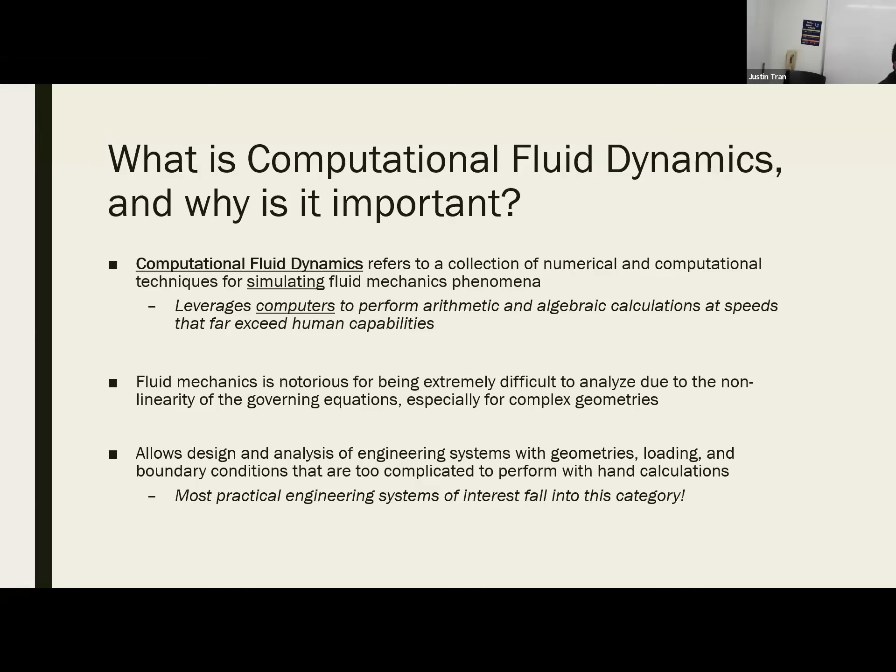So basically any practical work that you're doing in terms of engineering design or analysis with fluids, nowadays you have to use CFD for it. There's really no other way to analyze it unless you're doing experiments. And so through this, we are able to do all the really cool modern engineering work with fluids in terms of design and analysis on these really practical systems that you otherwise would not be able to do without CFD. Okay, so just to give you an example of the scale. What I'm showing you here, this is just a very simple pipe flow.

So we have flow, pressure-driven flow in a pipe. So we have pressure on one end, pressure on another end. If there is a difference in pressure, then that's going to drive flow from one end to the other. Okay. This is the type of problem you would probably see in your 333 class, your fluid mechanics. This is one you can very easily solve with Navier-Stokes.

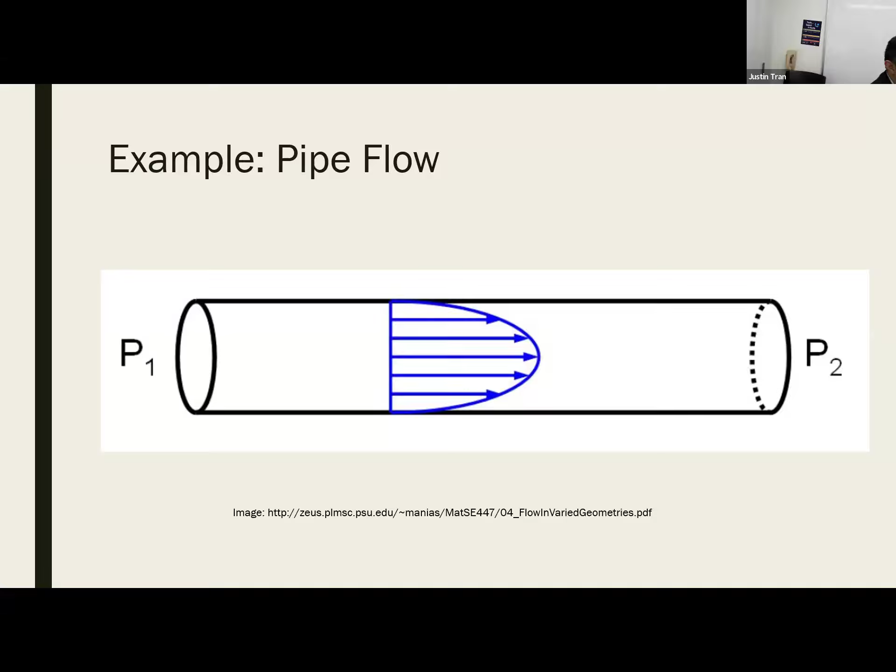But if you start to get into more complex scenarios like this, so this actually here is a screenshot from my research. And so what this is showing you is kind of an experimental cardiovascular surgery, actually. So just to give you a bit of background, this blood vessel right here and this blood vessel right here, I don't know why it's blue. Normally these two aren't connected, but we've actually connected these two with a shunt for certain patients that have a single ventricle. So that's basically patients with only half their heart working.

And so they need to do some, casually speaking, we have to do some plumbing on their blood vessels to make sure that this person has a fighting chance to be able to survive with only half their heart. And so one way we do that is to connect these two blood vessels to basically give a little bit of extra energy, a little bit extra flow to this blood vessel here.

Okay, so you can see in the situation we have very complex geometries. Blood vessels are not straight pipes; they are very smooth and contoured, and kind of have a weird shape. And so we wouldn't be able to analyze a system like this without CFD. You can see here we have a little bit of turbulent flow coming in here. We have kind of a jet here that splits off into two jets here. We have one that's impinging on this back wall. So this is something where you need to have CFD in order to analyze properly.

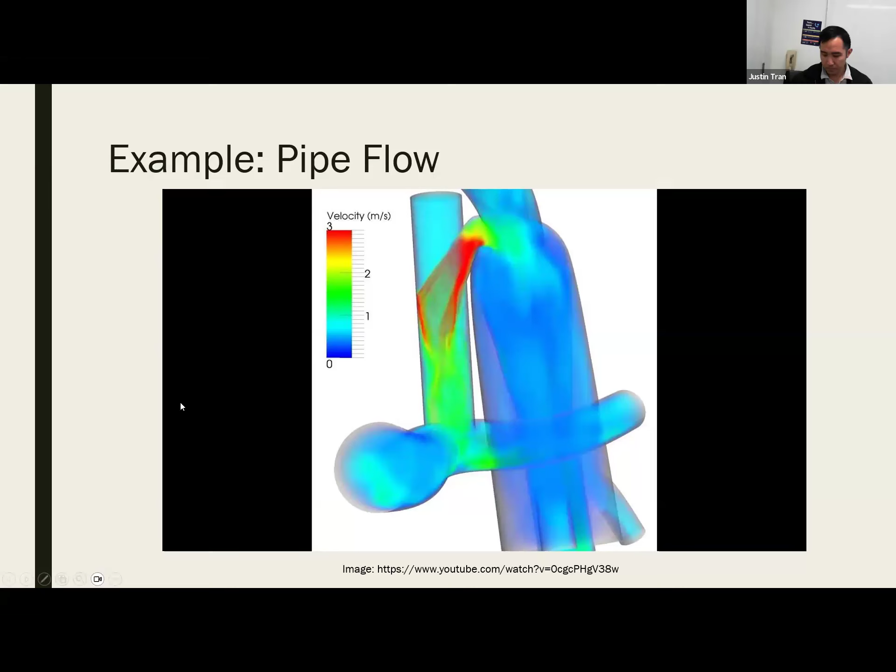Okay. So speaking of fluid mechanics, these are the equations for fluids. So hopefully this brings back some good memories from fluid mechanics. So this is the Navier-Stokes equations, which refers to the conservation of momentum in fluids. And we have the continuity equation up here, which is the conservation of mass. So these are very complicated nonlinear partial differential equations, which are not able to be solved normally. We can solve these in very simple situations, but for most practical cases, you can't really solve these equations without a computer.

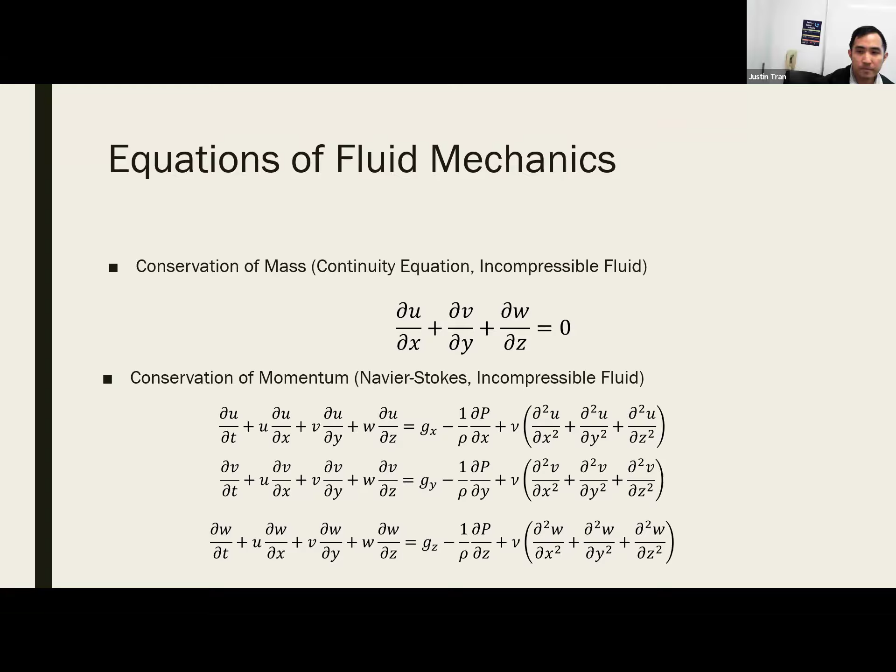Okay, so let's talk more about some applications. These are probably two applications that a lot of you are probably interested in. So on the left, we have an automotive application. Automotive design is very heavily influenced by the aerodynamics of the airflow that goes over the car, because the amount of drag that you have on your car has a lot to do with the fuel efficiency, with the top speed, the performance, and with how complicated car chassis are, you're basically unable to really analyze them without CFD.

Okay. The other image that I have on the right there is a very simple image of an airfoil. And so that is obviously an application from aerospace engineering. Aerospace engineering and CFD go together hand in hand as well. So if you're going to be doing any kind of design or analysis of aircraft with complex turbulent airflow going over it, you need to have CFD in order to properly analyze it. Otherwise, it's just not possible. Okay.

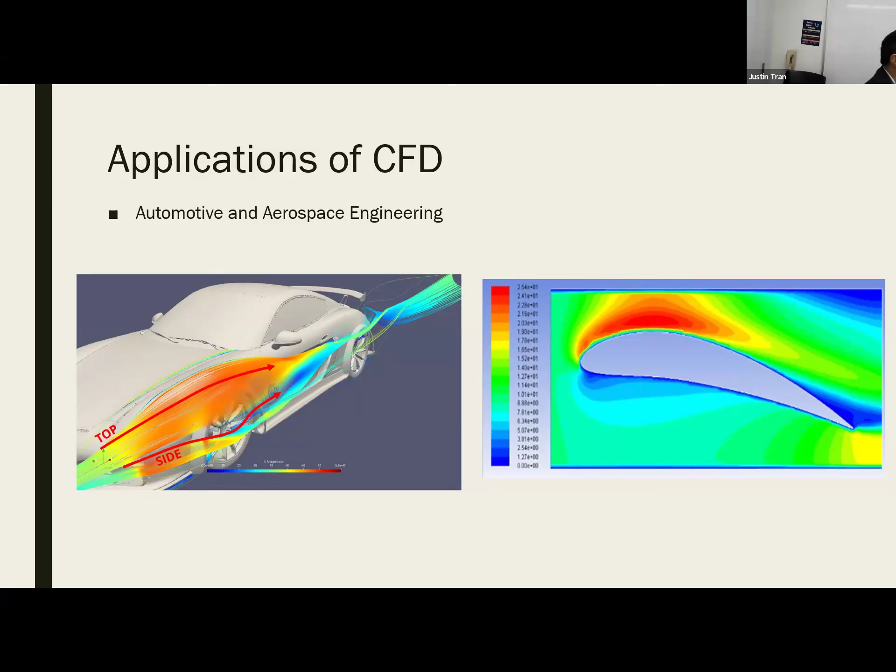All right, but there's also applications in environmental engineering as well. On the left here, we have a large scale CFD simulation of airflow over a very large region. A lot of the weather predictions that you see on the news in terms of predicting which way a storm will go, CFD plays a role in that. You need to be able to model and predict which way the winds are going to blow and how that's going to affect your weather.

Okay. And on the right there, you can actually see a CFD simulation of a windmill that is producing power as well. So CFD obviously plays a big role in designing those kinds of structures as well. Okay. Let me pause here just because these are nice images as well. Are there any questions on anything so far?

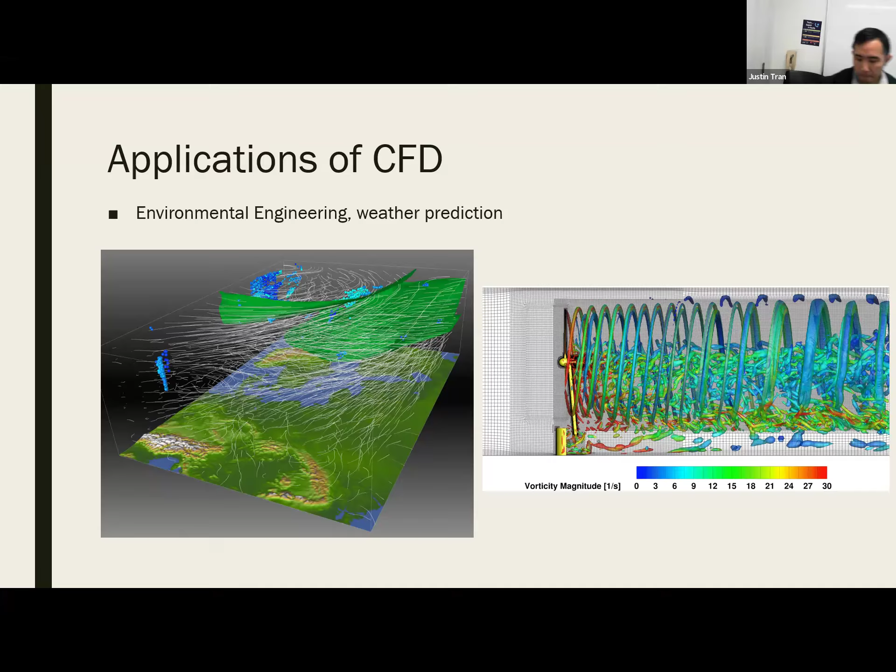Good. Okay. All right. So, like I mentioned before, if you're going to be doing any kind of practical work in fluids, no one really does calculations on pencil and paper anymore. You really kind of fall into two categories. And so you can either do experiments or you can do simulations.

Okay. And so if you're taking an experimental approach, your goal is to try to recreate the fluid flow conditions in real life and measure the results, right? And so a very common way to do this is to have like a wind tunnel, which is kind of what you see on the right there, right? And so experiments are always great for getting accurate and reliable data because there's really no disputing an experimental measurement because it actually happened. There's very little room for error in that sense.

But the downside of running experiments is that it can be very time consuming and expensive to set up. So oftentimes you'll see a situation like this where you need to create a prototype. This is probably not a full scale airplane here. This is probably a scaled down version. But even creating that prototype takes a very, very long time, right?

And so usually, practically speaking, you have to do experiments. You can't just fully rely on simulations to do your engineering work. But you oftentimes want to limit the amount of experiments that you do, because you can't really afford to be doing a ton of these types of experiments.

And so I would say the bulk of design work, bulk of engineering work with fluids nowadays happens in simulations using CFD. Okay. So a lot of times, people will use CFD to run a simulation on airflow over an airplane and use that to iterate on designs. And then usually 90% of the work is done there. Once you feel pretty confident about the design, then you'll take your results from CFD and apply that to an experiment to try to verify whether what you got was good or not.

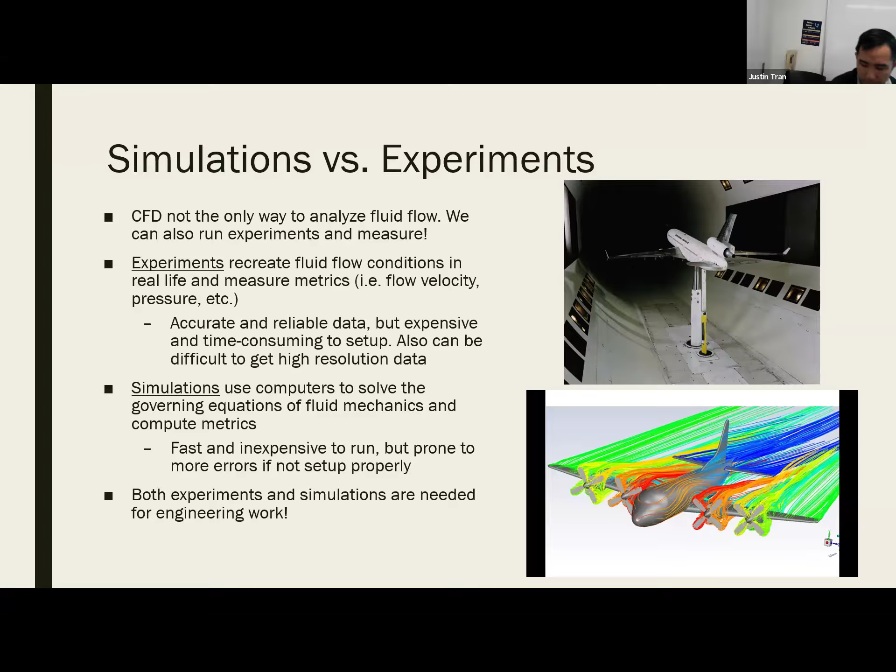Okay. All right. So, another question that I get asked about classes like this, where we're not just going to be learning the software, but we're actually going to be learning the theory behind what goes into the software: why are we bothering to learn the theory? Why are we bothering to learn the computational techniques? Okay. And so, doing CFD is more than just using the software. Right? It's more than just using OpenFOAM to run a simulation and generate a nice plot. Okay.

Because it's important to remember that these simulations and these softwares are simply just tools for you to perform engineering work. Okay. And just like any tool, it has limitations and best practices that need to be properly understood before it can be used effectively. Okay. Because the thing with simulations, and if you have experience doing FEA or ANSYS you would know this very well, it's not going to work all the time. And so, there's plenty of ways for a simulation to go wrong. There's literally millions of different errors that can show up.

And so in order to use it properly and to debug these errors, you need to have a firm understanding of the fundamentals behind the technology so you can debug these problems and get reliable results. Okay. Because my goal by the end of this class is for everyone in this class to become experts in CFD, right? A lot of you guys are graduating this semester, or this summer, or in the fall, right? And so if you're going to be going to a company and doing CFD work, I want you to have the confidence to say that I'm an expert in this.

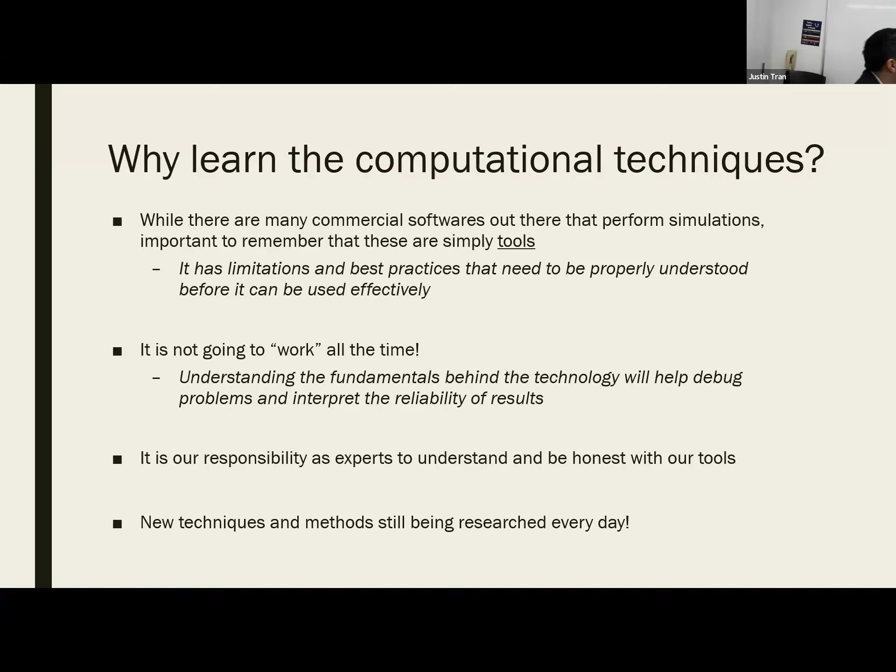Okay, so to give you an example of why it's important to learn this conceptual background knowledge, let's take a job that I think probably a lot of us have experience with: a vet, right? If you've ever taken a pet to the vet, you know that the vet has to have a lot of what I call procedural skills. They have to know how to give a shot to an animal, how to take a blood sample, or perform eye and ear checks, right? So this is generally what we expect our vet to do.

But we also expect our vet to have conceptual knowledge as well. So for instance, they have to know why they're giving your animal a shot, right? They're not going to say, oh yeah, I kind of feel like giving them 3 shots today. And then you're like, why? This is my cat, don't just give them random shots, right?

And it's kind of the same for us as engineers. We're expected to not only know how to use our tools, but to really understand them on a deep level as well.

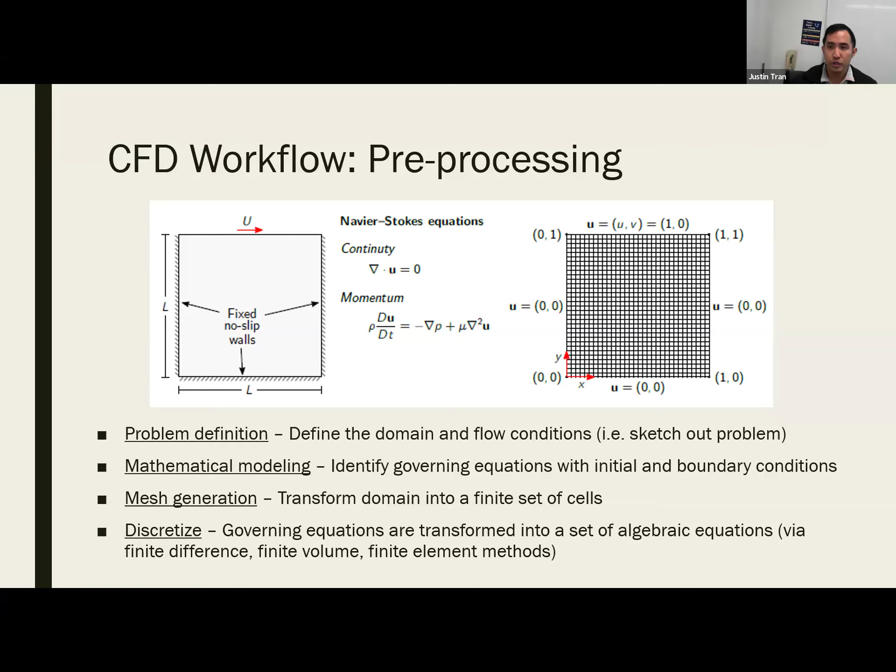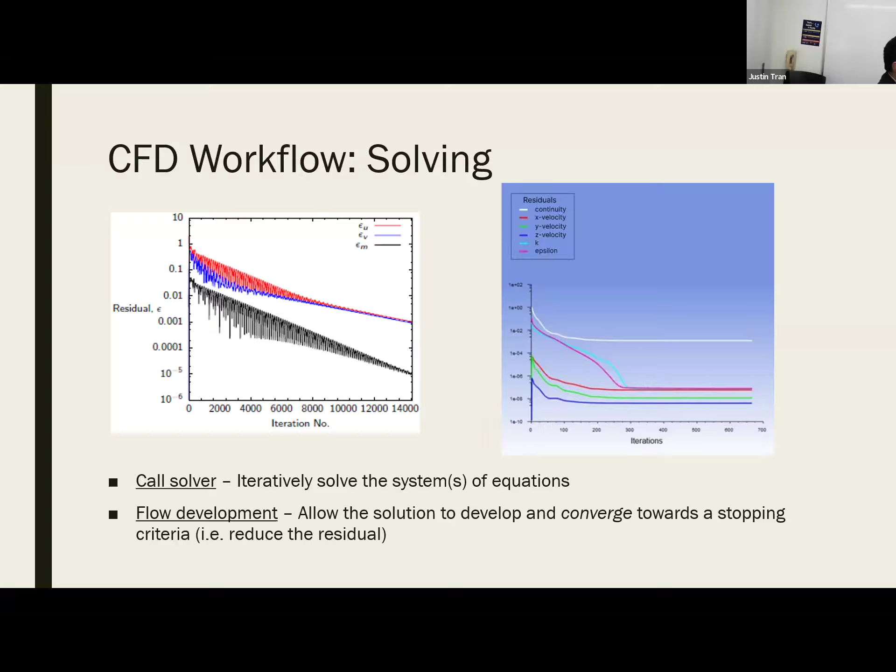Okay, so the second step, broadly, we can call the solution step. This is actually the step where you do the least amount of work; the computer is doing a lot of the work. Once we've set up the problem and done our pre-processing, we just hit go and let the computer do its thing. The only thing we're doing is monitoring it to make sure things are going smoothly in terms of what we expect.

And then the last step is the post-processing. Whenever you run a computational simulation, the results that you get directly from the solver are usually not directly useful. So there's a little bit of post-processing and visualization that you have to do in order to produce plots like the following that you can actually interpret and use for engineering design. So those are the three general steps: the pre-processing, the solution, and the post-processing. Of course, we'll be going over these in a lot more detail throughout the class.

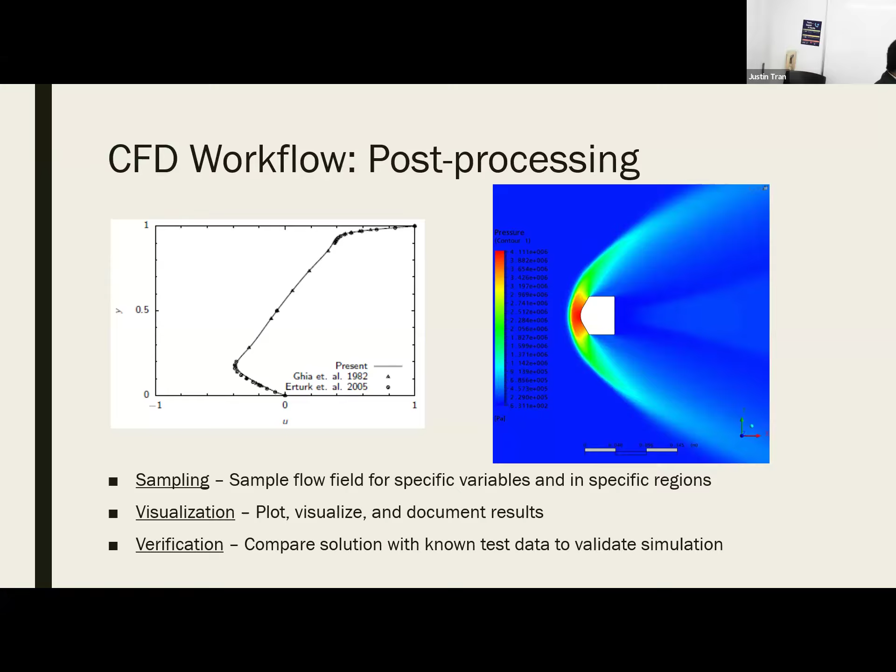Okay. So let's talk briefly about different CFD codes. There's lots of different software out there that can run CFD. In fact, it's kind of a claim to fame: a lot of people want to write their own CFD code and have it become famous and have everyone use it. We're not going to go through all the CFD codes out there because there's literally a lot of them.

But I do want to make a distinction between two different kinds of codes that you're most likely to experience out in the wild, so outside of this class. The first class of codes are what I call commercial codes. These are the type of codes that you spend money on. Usually most companies use an active subscription model, so you have to renew the license for these softwares every year. That's how these companies make money.

Okay. The benefit of a commercial code is that they are actually developed by a company, and they have full-time developers that are paid a full-time salary to support the software. Usually these types of softwares have more bells and whistles, like a graphical user interface that you can click around. They actually have a support team that will answer your questions if you email them most of the time. Which is really nice, because a lot of times you want to have these nice features.

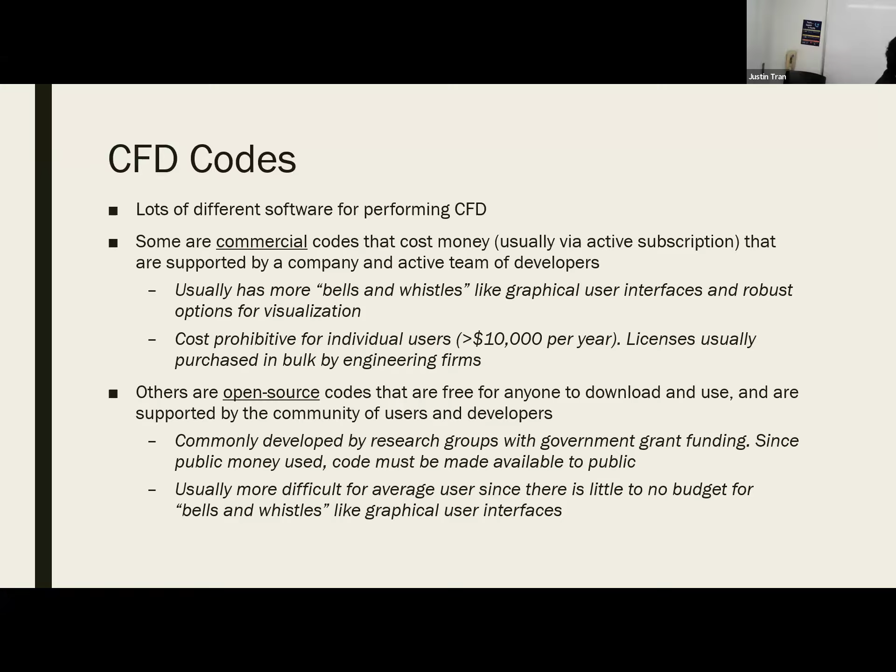I mention that because the main software that we're going to be using for this class is OpenFOAM. OpenFOAM is probably the biggest open source CFD project out there. It has a great community and has been very active for a very long time. I think the project is about 25, 30 years old at this point. It's an open source toolbox written in C++, and it's distributed under the GNU General Public License. Okay.

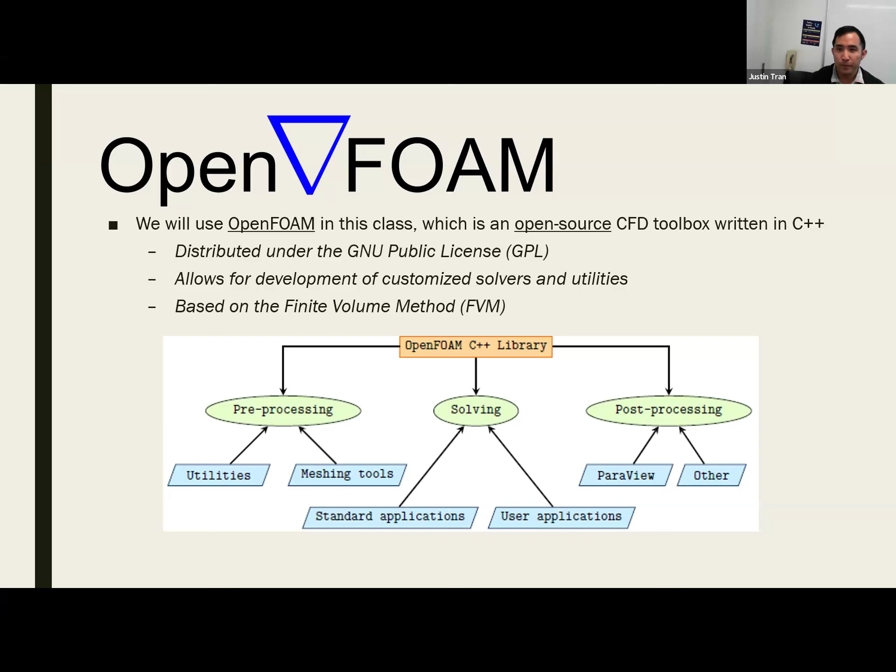OpenFOAM is great. It's been used to do a lot of really great work, and a lot of great research is based on OpenFOAM, but you have all the downsides of being an open source code, mainly that there's no graphical user interface. So the way that we use OpenFOAM is that you have to know a little bit of coding, and you have to be familiar with a Linux interface.

I think that'll be the big step up for most people here: using Linux for the first time. If you've never used Linux, it's going to be very different than what you're used to. Linux is a whole other operating system. Most people are familiar with Windows and Mac. Linux is kind of the odd cousin that people don't talk about a lot. But Linux is great for open source projects.

And so maybe something you didn't expect from this class is that you'll be learning a little bit of Linux along the way. But that is something you can put on your resume too. And that's something that employers actually like if you do have experience with the Linux terminal.

Okay. So to set up an OpenFOAM simulation, you have to set up this very strict file directory. You have to have these files in the right places. And all of these files are written in basically text code. But don't worry, we'll cross that bridge when we get to it, but I just want to send a warning now. Any questions on this before we jump to the syllabus?

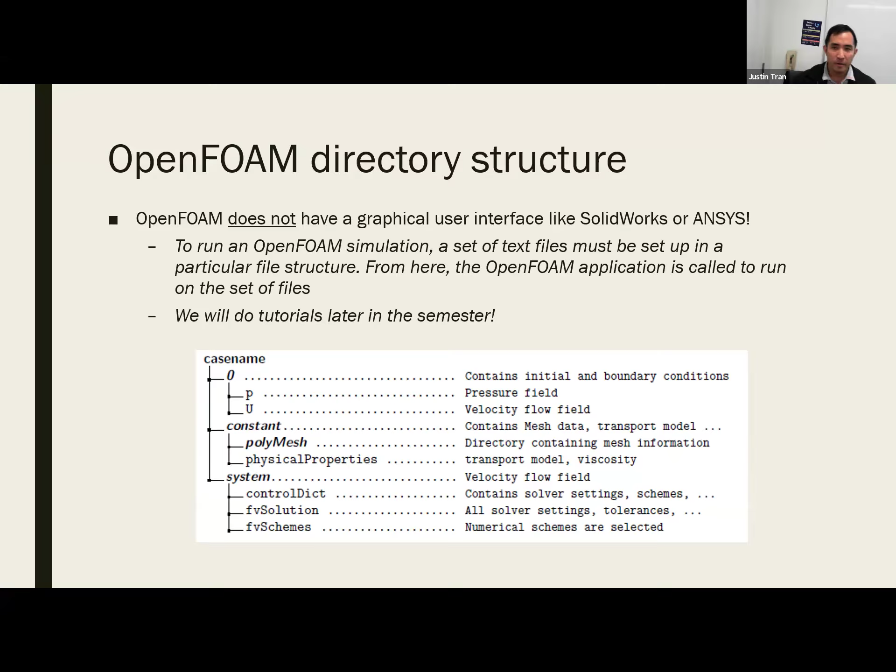So hopefully that gives you a little bit of sense of the structure of the class and what to expect. For the first half of this semester, I would say the first 7-8 weeks, we'll be doing mostly theory. That will be more pencil and paper, traditional note taking. There will be a little bit of MATLAB sprinkled in. And then the second half of the class will be focused mostly on OpenFOAM, to help prepare you to do your final project as well. Okay, so let's talk about the syllabus.

So the first thing I want to talk about on the syllabus are my office hours. Office hours are going to be 3 days a week. I will be physically in my office, E220, during office hours, but you are also free to join via Zoom as well. There are Zoom links on the course website for you to join office hours for each of these times.

My office hour times are Monday, Tuesday, 2:30 to 3:30 p.m. So that's basically right before lectures on Mondays. I also teach at 4 p.m. on Tuesdays, so that's right before the lectures on Tuesdays. And then Thursdays from 1 to 2 p.m.

I know what everyone's thinking, these times are not ideal. Usually I don't like to stack them. All of these are stacked in the early afternoon. Usually I like to have a little bit more variety in my office hour times, so I'll have one in the morning, one in the evening, one in the mid-afternoon. But one thing that just happened to me recently is I have a kid now.

And that limits my availability. In the mornings, I'm usually taking care of the kid before my wife prepares for work. And even in the evenings, I have to hurry home and give my wife a break from taking care of the kid too. So I'm really only here late mornings up until the early evenings, and that's when I can do the office hours.

So, with that in mind, these are not the only times I can be available, because I know you guys are all really busy. If none of these times work for you and you want to talk to me, you have questions on the homework, the content or the exam, just send me an email and we can set up a time to meet, most likely over Zoom, maybe in the late evening or early morning, whenever works. So don't be afraid to reach out and set up an appointment. But at least these will be the times where I'll be available for sure for office hours.

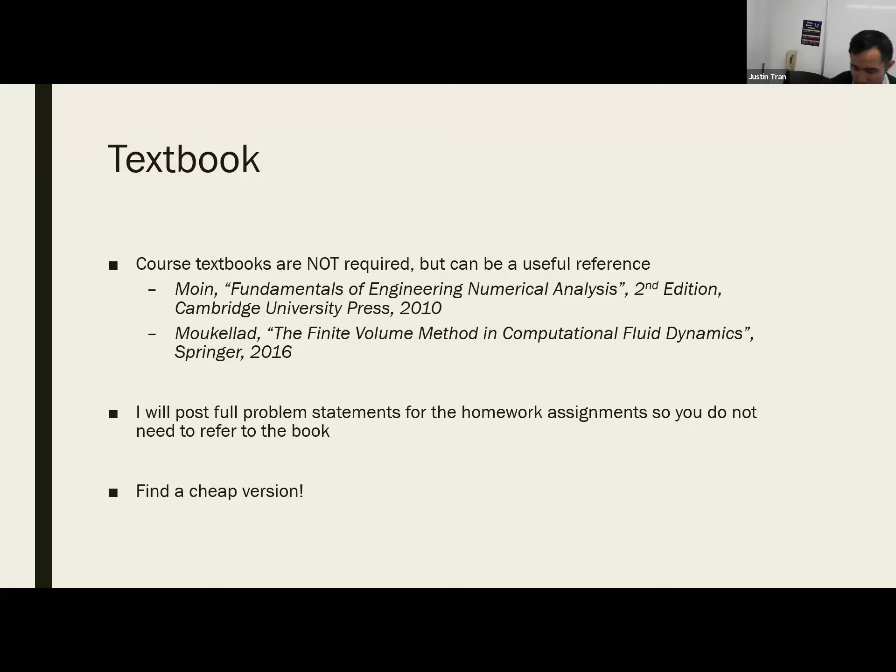Okay, programming. Naturally, being a course in computational fluid dynamics, there's going to be some programming involved. On the one hand, we're going to be using a little bit of MATLAB in the first half of the course. That's just to drive home some of the theory that we're learning in terms of finite differences and finite volumes. I don't plan on making it an emphasis. None of the projects are going to require MATLAB. But it is useful to use MATLAB to really see how the finite difference method works, how the finite volume method works.

Okay. So I think someone sent me an email already that they're feeling a little bit uneasy with the programming. There will be some MATLAB programming, but it's not going to be an emphasis. I think probably the bigger programming aspect, or the bigger computational aspect, is going to be the Linux stuff that we're going to do in the second half. Probably no one or very few of you actually have direct experience with Linux, and so that stuff we'll be learning from scratch for sure.

Okay. But I do expect you to at least know how to open MATLAB, how to do a basic for loop, basic if statement, define a variable. And so I am going to be assuming that you do have that kind of basic information when we do the first half of the class. But just know that the MATLAB is not going to be a huge emphasis. So if you're a little bit rusty on the MATLAB, don't worry too much. We are going to do a little bit of review. And the Linux stuff, because it's going to be everyone's first time, we'll be doing that one from the basics.

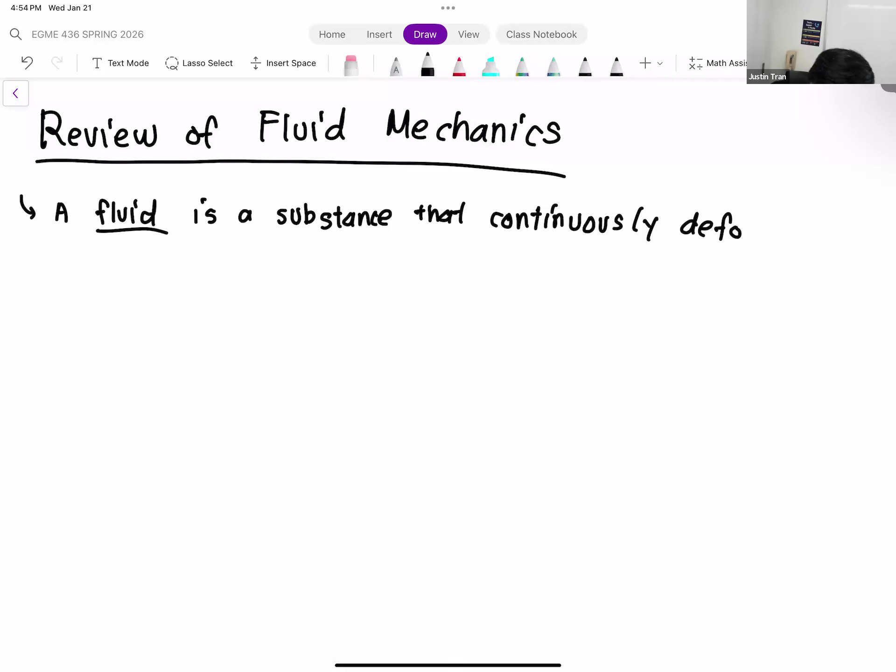Okay. The key word here being continuously. And so we make a distinction between fluids and solids. So solids, if you apply a stress to a solid, it may deform a little bit, but eventually you reach an equilibrium state where the solid no longer deforms, right? For example, let me take the stapler right here. The stapler is a solid object. If I apply a force to it, you can see the stapler goes down, but eventually it stops because it's a solid object. A fluid is not like that. A fluid, if you continuously apply a force to it, it's going to continuously deform.

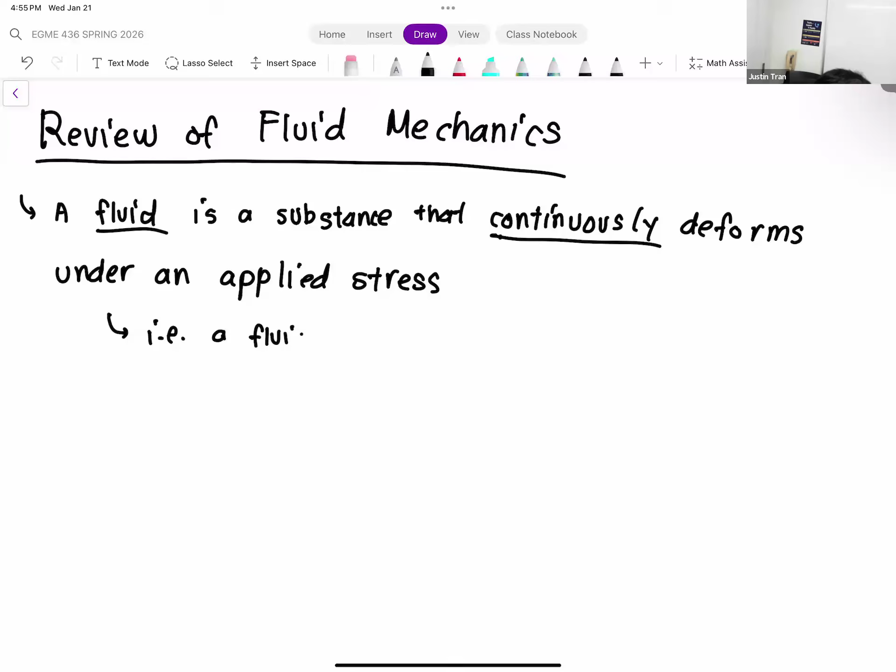And so no one's saying that, oh, the air is continuously deforming out there, right? We say the air is flowing. And so the way that we typically describe this in normal speak is flow. Okay.

All right, and so in CFD, we're interested in basically simulating fluid flow. I know there's a whole area of hydrostatics. I think that's probably the first thing you learn in fluid mechanics, but we really don't care about hydrostatics in this situation. We're really only interested in fluids that are in motion. And so because of that, we are interested in a very particular property of a flowing fluid called the velocity field. So the velocity field of a fluid is a vector field that describes the direction and speed of the flowing fluid at every location within that fluid.

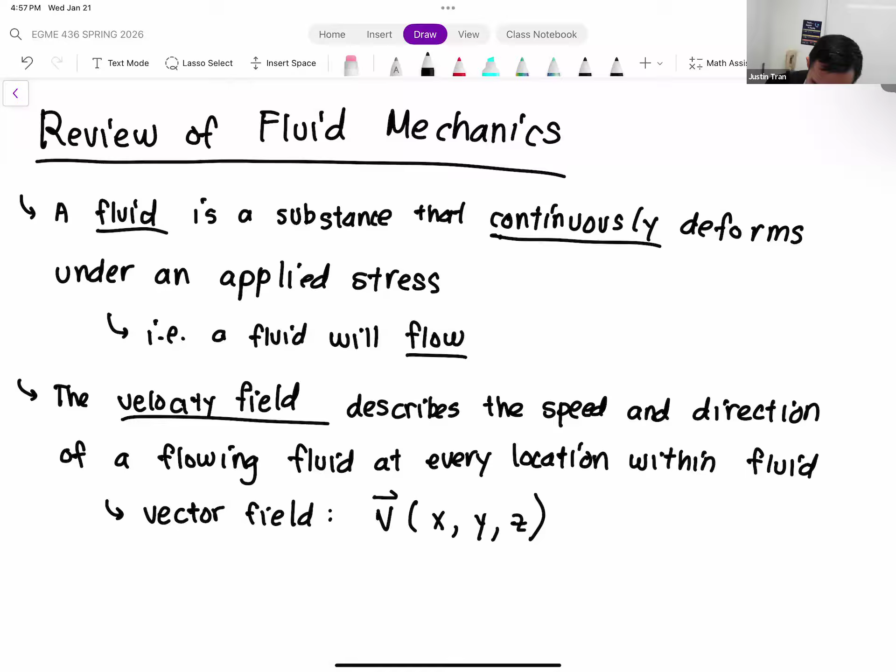And so the way that we describe the velocity field is that it is a vector field. And if you remember anything about vector fields from Calc 3, basically at every physical location, we're going to define a vector there. So the way we typically define this is as a vector field V with an arrow on top. And this is going to be a function of physical coordinates, X, Y and Z in 3D. So again, this vector V here represents the flow velocity vector. And this XYZ here, these are physical coordinates.

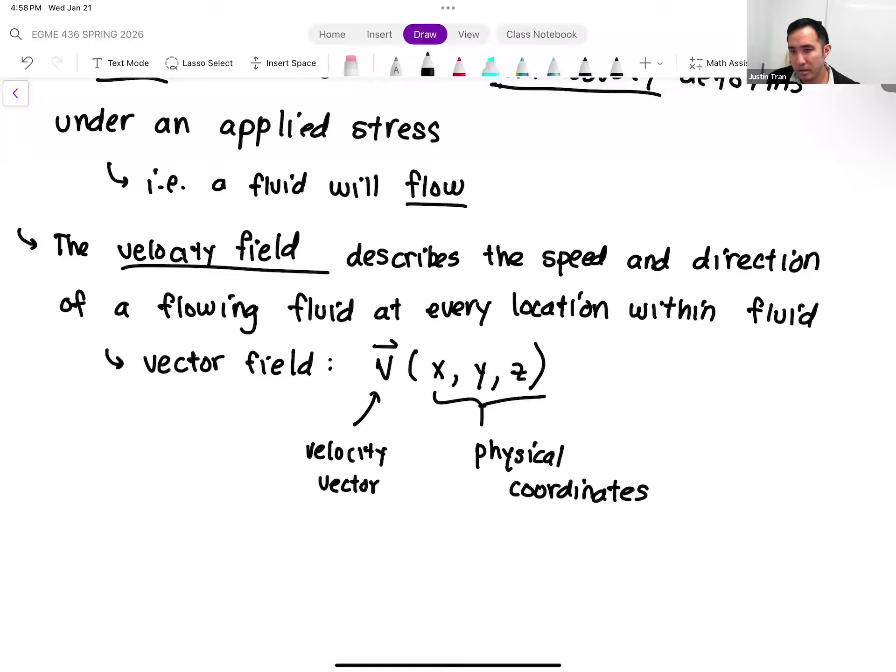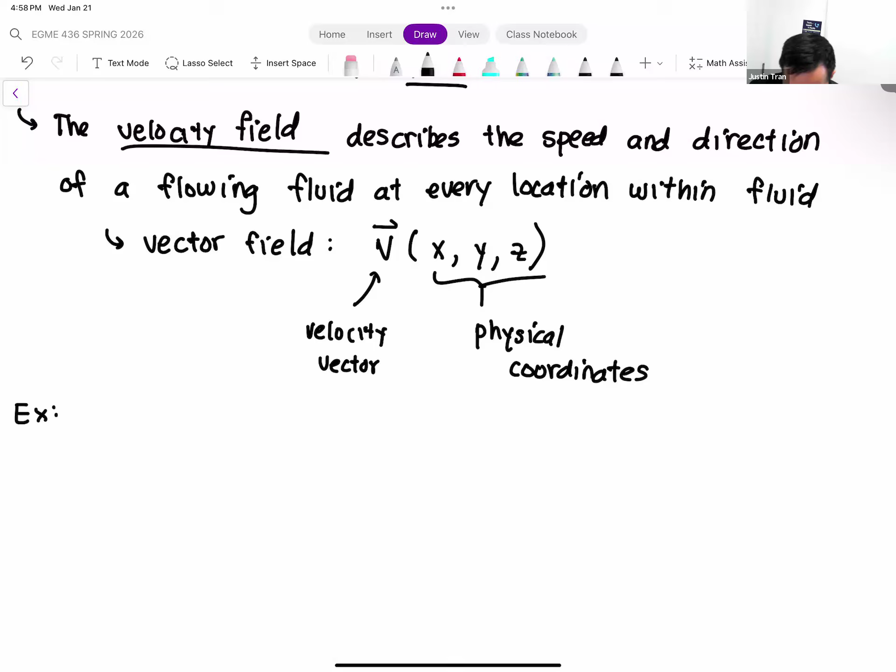Okay. So let's draw this out just so you can visualize it, because describing a vector field is not the same as visualizing it. So let's do an example here. Let's say that we have a very simple velocity field of a flowing fluid that looks like the following. And let me actually use blue. So let's say we have flow in like a river or a stream or something like that that looks like the following.

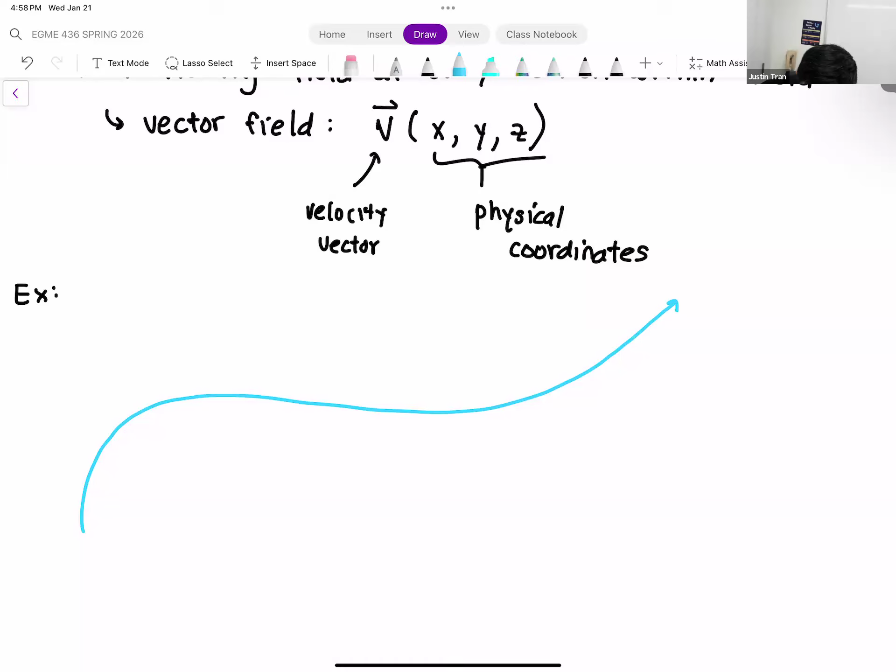Okay. That's a good measure. Okay, so the blue lines that I've drawn here are the direction of the fluid flow in this application. So we can say this is maybe fluid flow or flow of water in a stream.

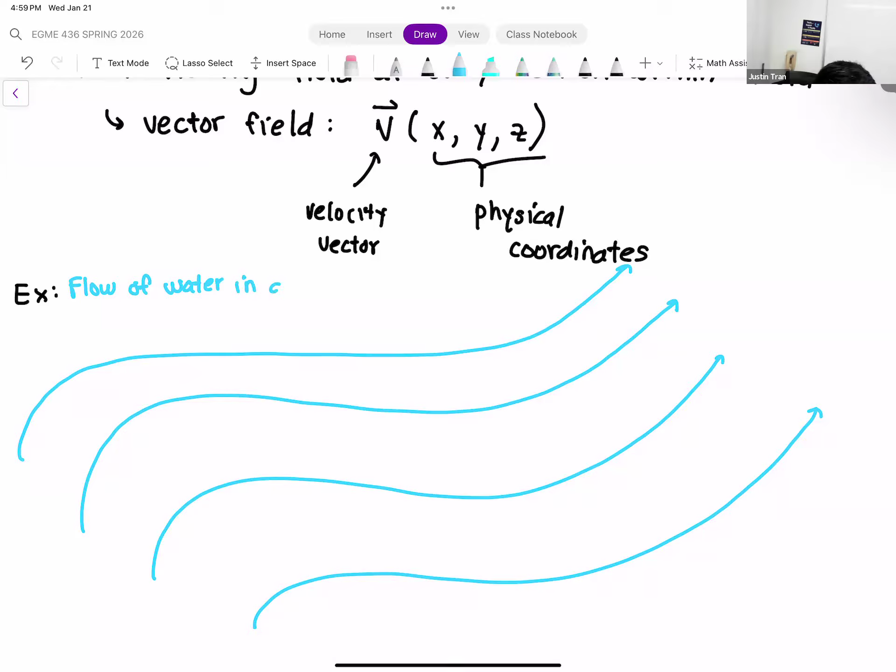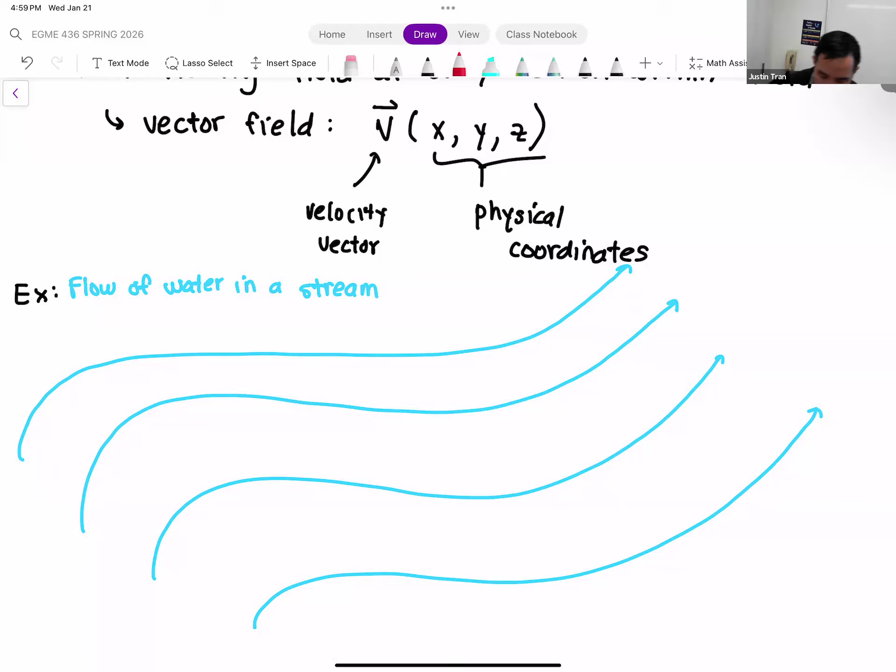All right, so the way that we can describe the velocity field in this is that, first of all, we need a coordinate system, and so we need to have an origin, right? So let's say, well, this is obviously a 2D scenario, so I'm only going to draw XY coordinates. So let's say we draw the origin right here. X, Y, okay? So this right here is the origin of our coordinate system.

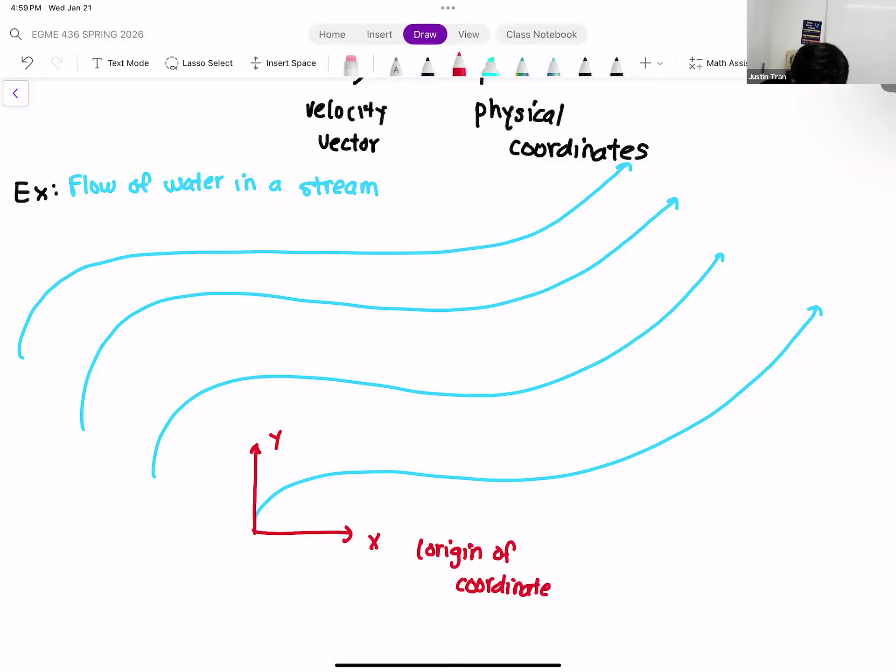We're using Cartesian coordinates just to be simple for now. Okay. And so based on that origin, we can define a physical point by a paired X and Y coordinate, right? So let's say that we define this point right here. So this point, we can say that its coordinates are x1, y1, right? Or that x1 and y1 are the x distance and the y distance from the origin. Okay.

And the same thing, we can draw another point here. Let's draw this one here. We'll call this x2, y2. Okay. So the requirement to have a vector field is that you do have to have an origin, because you need to be able to describe the physical locations of every point within the field.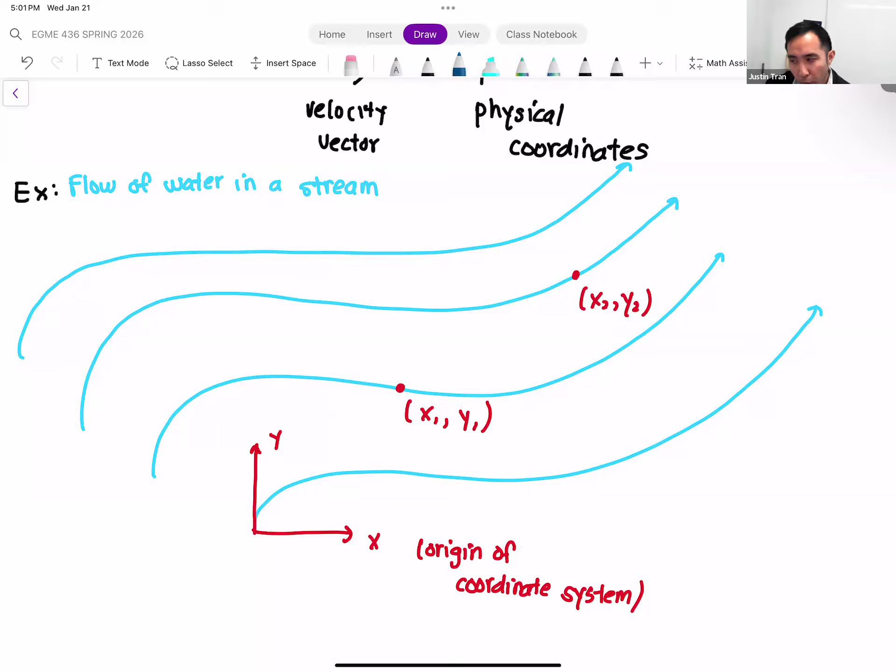All right. So the velocity field, at each of these locations and at basically any location within this field, we can describe what the velocity vector looks like. Okay. And so let's use dark blue. So let's draw what the velocity field would look like at these two locations, x1, y1 and x2, y2. So at x1, y1 here, the velocity field is going to basically follow the flow. It's going to be a vector that points in the same direction as the flow and have a speed that matches the flow as well. So at this location here, we have a vector that goes like that.

So we have a vector that points almost horizontally to the right. It's going down a little bit. And so this vector right here, this is V vector at x1, y1. Okay. So that's our velocity at that location defined by our velocity field. And then at this second location here, we can draw another vector that's parallel to the field. And so this vector here, this will be v at x2, y2. Okay.

So the idea with the velocity field is that, for any given location within the fluid flow, you can define what the flow vector is going to look like. And a vector, remember, always has direction and magnitude. Okay. So velocity fields is a concept that we'll be coming back to continuously in this class, because the main output or the main goal of CFD is actually to produce the velocity field in your flow. And that's often what we're going to be simulating for. All right. Any questions on this so far? Good. Okay. So that's the velocity field.

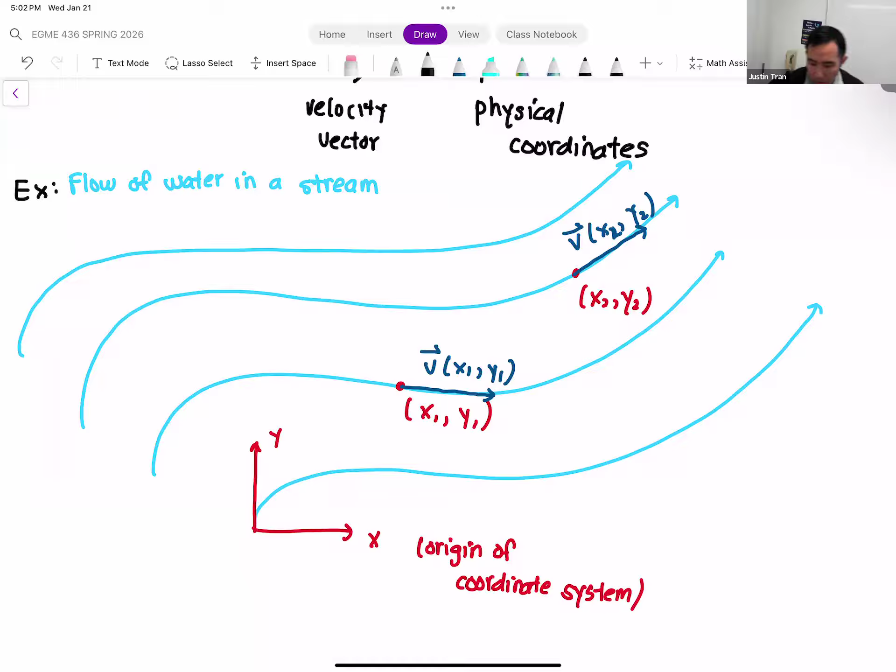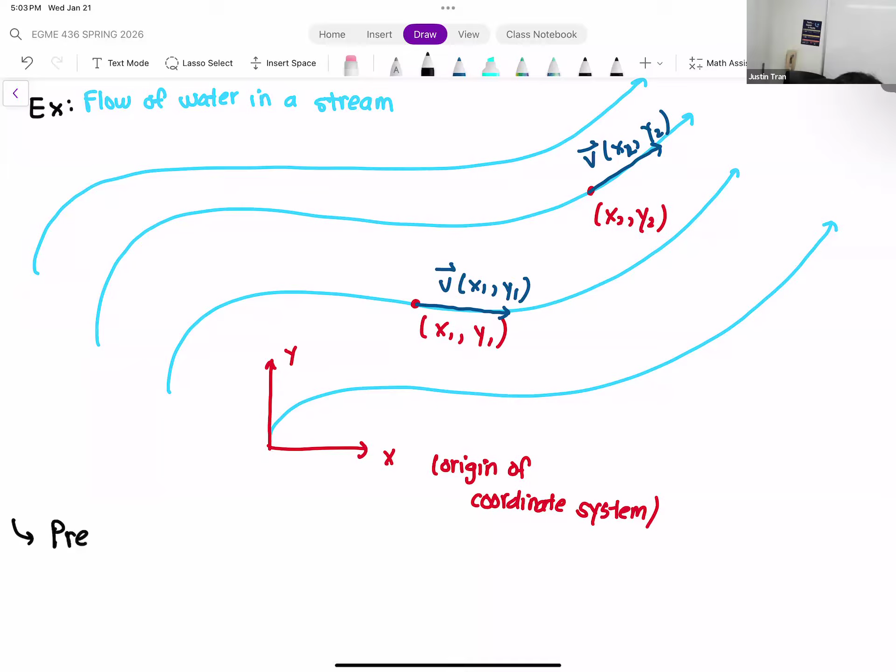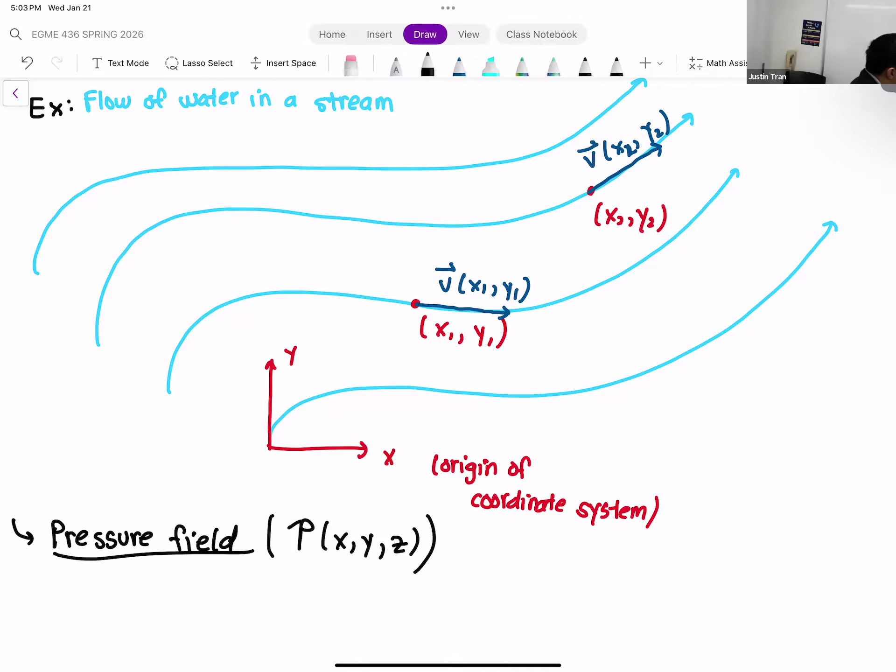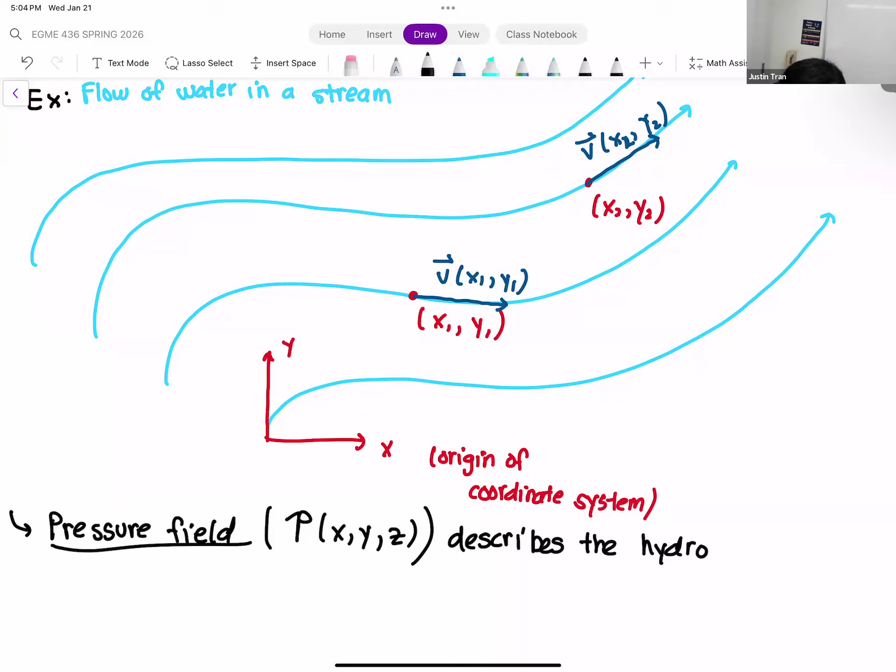Although in fluid mechanics, there's another field that we're usually aware of, and that is the pressure field. So the pressure field, similar to the velocity field, is a field variable, and so it depends on the physical coordinates, and so it's going to be a multi-dimensional variable. For the pressure field, we usually denote it by a capital P, and again, it's going to be a function of x, y, and z, or just x and y if you have a 2D situation. And so the pressure field is going to give you the hydrodynamic pressure at any given location within the fluid. Okay.

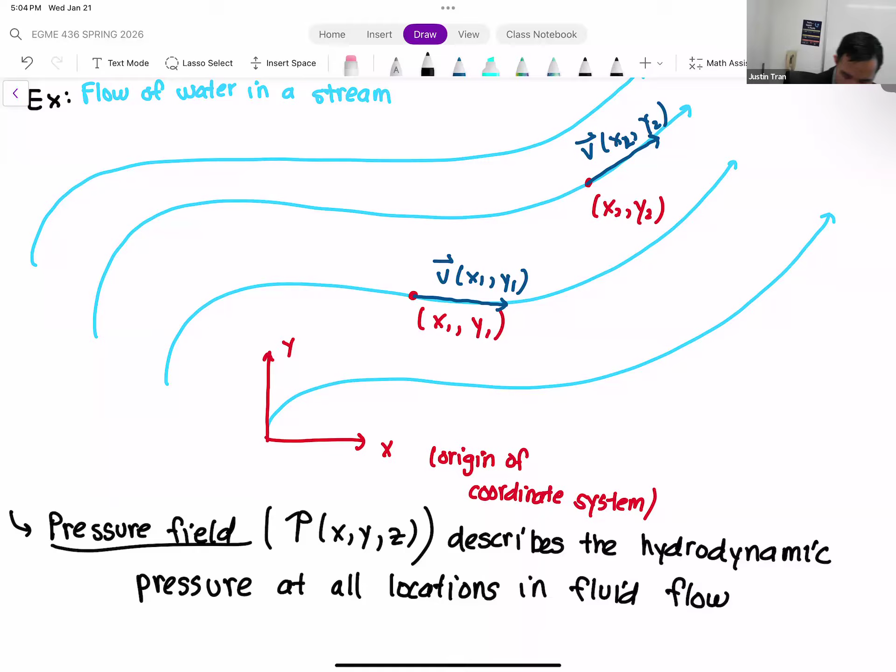All right, so we have these two field variables that we are going to keep in mind. Along with the velocity field, the pressure field is also a primary output of CFD. So oftentimes when we run CFD, we'll get the velocity field and we'll get the pressure field as well. Now, pressure is an interesting concept because it's not a vector. Pressure is a scalar quantity. And so what that basically means, a scalar just has magnitude. It doesn't have direction. Okay.

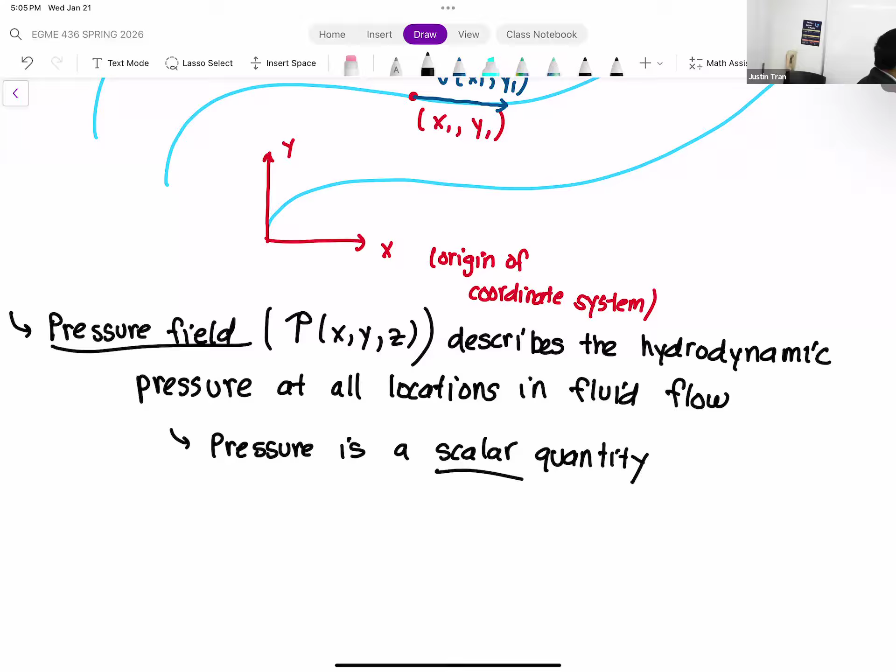But remember, the reason pressure is important in fluid flow is that oftentimes fluid flow is driven by differences in pressure. Or another way to describe it is that fluid will flow from high pressure to low pressure. Okay. Just to put it very, very simply.

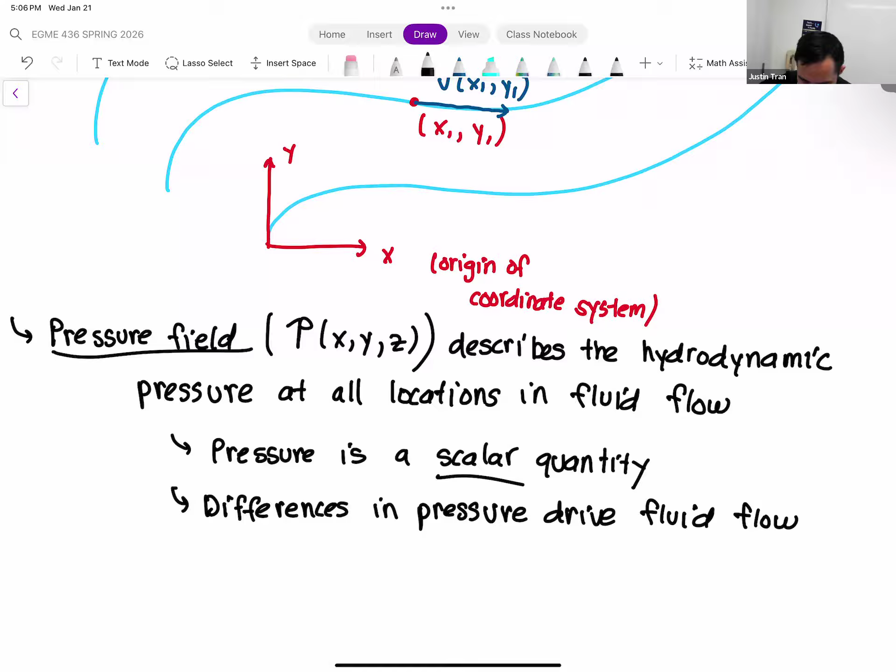Pressure fields do have other applications as well. If you're going to get into high level aerodynamics, and if you're going to be dealing with shocks or wakes or drag, then pressure is going to be important there as well. But just on a very rudimentary level, if you understand the pressure field, you can make a prediction in terms of which way the flow will go. The flow will go from high pressure to low pressure. All right. And so, like I've mentioned, the first goal of any CFD simulation is to solve for the velocity field and the pressure field in a given flow situation.

And then usually from those pressure fields and velocity fields, you can compute lots of other really interesting quantities, like drag, lift, shear stress, wakes, vortices, things like that. But step one, always solve for the velocity field and pressure field. Okay.

And if you kind of remember from earlier in the class, velocity and pressure, these are basically the active variables of the Navier-Stokes. And so essentially you solve the Navier-Stokes equations, you get velocity and you get pressure. Okay. All right. Any questions on this so far?

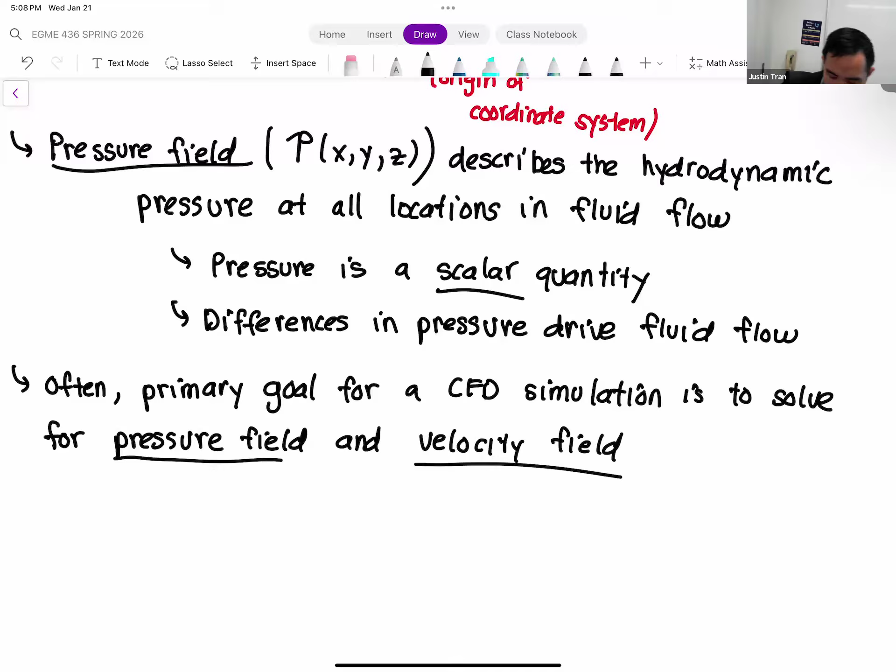Okay. So let's talk very briefly about fluid material properties. I think that will be the last thing that we cover today. So even though fluid is a different state of matter, they do have their own properties. And if you're going to run any CFD simulation, you do need to input these properties because different fluids are going to behave differently, right? Air is going to flow a lot differently than molasses. And so you need to make sure that you input these properties correctly in order to accurately simulate.

And so there's two main properties that you basically have to apply for every single flow. There's usually more properties besides this for more advanced applications, but at the very core basic level, these two properties are the ones you have to input for every simulation. All right, so let's start with density first, so that one's a little bit easier to understand. So density, hopefully, requires no introduction. Density describes the relative mass of the substance relative to its volume.

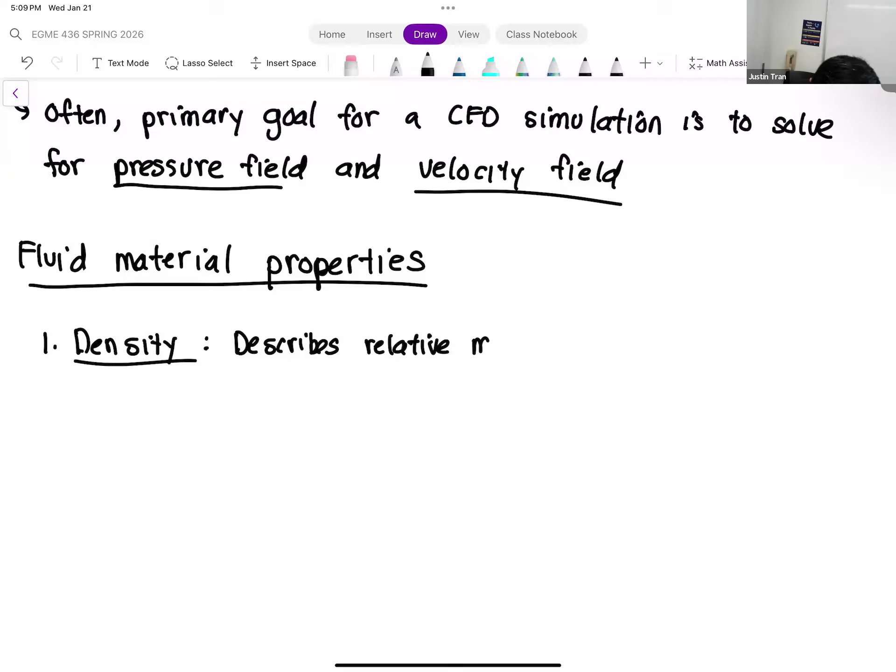Okay. Right, so there are different substances that have higher density. Usually, those are substances that have very heavy molecules that make up their chemical composition, and there are substances with very low densities. And what's interesting about CFD and just fluids in general is that you have a very wide spectrum of different densities. On the one hand, you have a very common substance that a lot of industry would work with, which is just air. So air is very not dense, mostly just because the distance between air particles is very, very large.

But there's also applications for CFD where you work with very, very dense fluids, things like liquid mercury. And so there are applications for that where you would want to run CFD. So there's a very wide range of different densities available in fluids, and that obviously drastically changes the behavior and the results that you get from CFD. Okay, so the other comment that I'll make with density, one that will become very relevant later on, is that oftentimes we assume that the density of the fluid is constant.

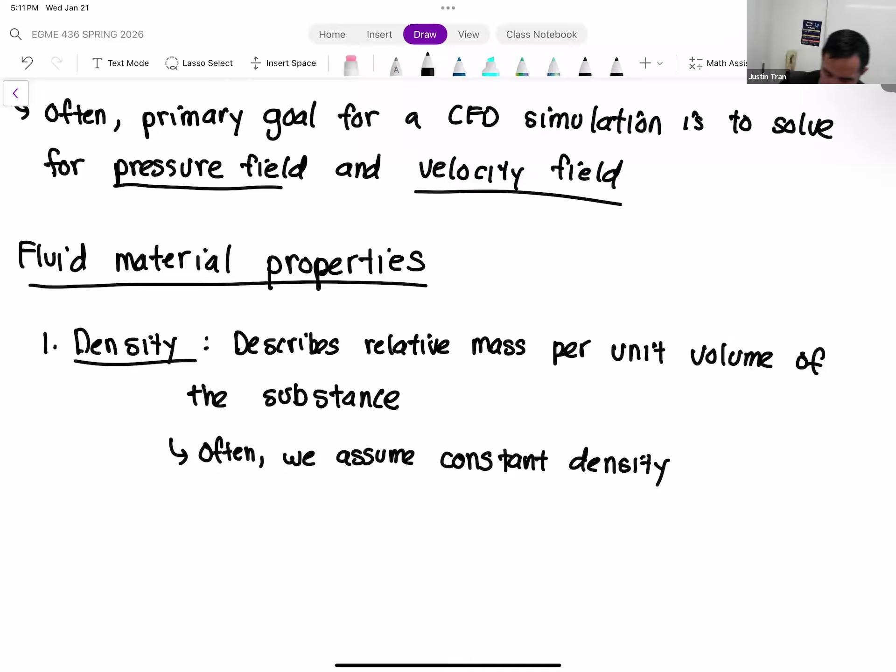And this is actually a very important assumption because this leads us to what's called the incompressibility assumption. So incompressibility is very interesting. Fluids have this unique property where you can actually compress it. So you can effectively squeeze it enough or run it fast enough such that the distance between particles becomes affected enough to actually make a difference in the density.

So that mostly has applications in aerospace engineering. If you start to have very high speed flows, you get to supersonic flows, Mach numbers 1, 2, around that type of flows, then compressibility becomes a concern. But for the most part, for this class, we're going to assume our flows are incompressible, just because it makes the math a lot easier. But I did want to mention that here. There are applications where you have a non-constant density, density that depends on pressure and velocity. But we're not going to be dealing with that in this class.

Okay. So the other property that is important to know for fluids is its viscosity. So the viscosity of a fluid describes how well the fluid essentially sticks to itself. And I write sticks in quotation marks because that's definitely not the scientific way to describe it. There's no textbook out there that will say it like that.

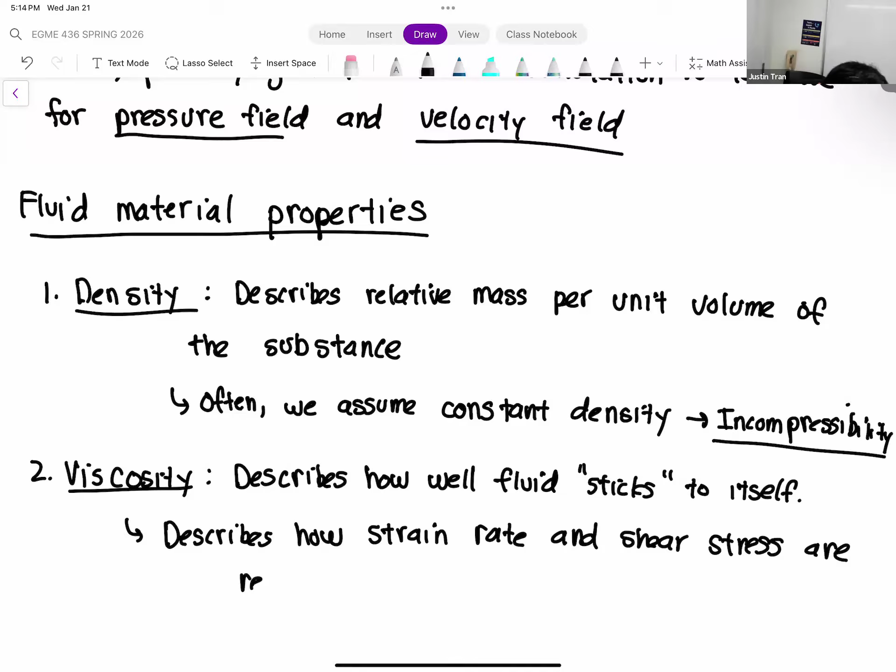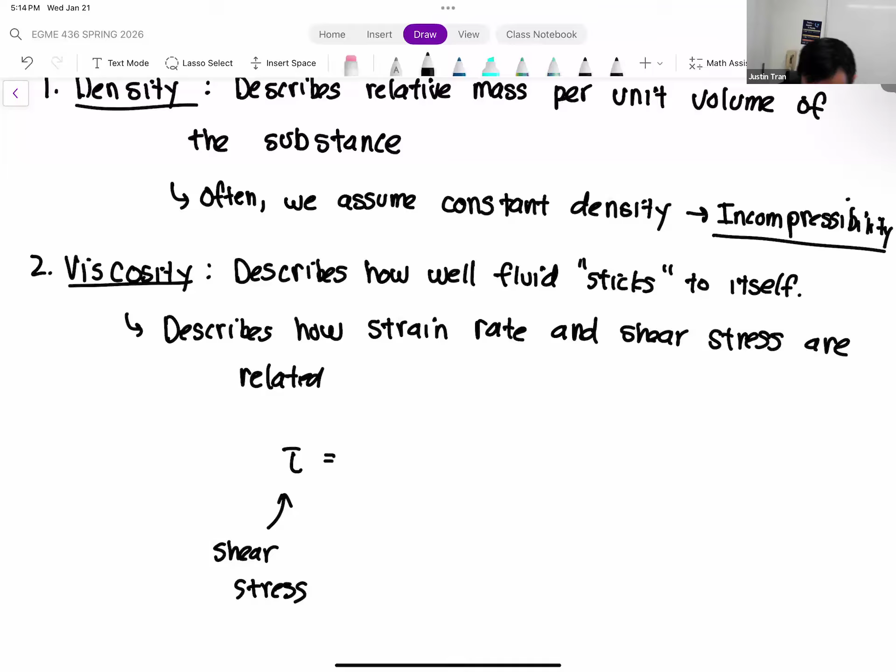And so there is a formula from fluid mechanics that looks like the following. So we have tau. So tau here is an expression of the shear stress. Okay. So the shear stress is basically any kind of force that the fluid can impart on another object through shearing, basically. So if the fluid kind of flows past an object, the amount of force that you kind of feel, the friction force, that's the shear stress.

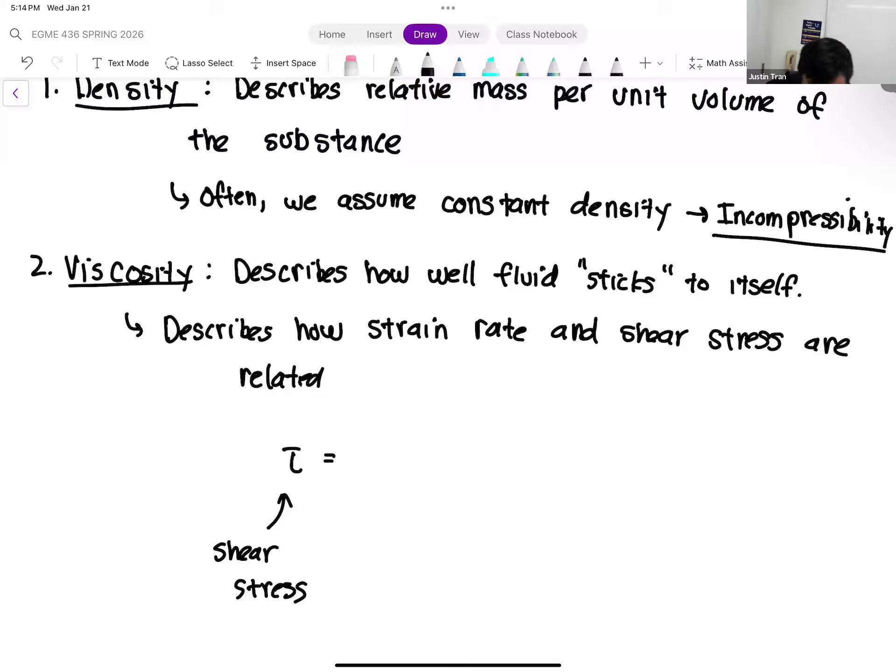Okay. And so this is equal to the viscosity multiplied by the strain rate. So the strain rate is simply just a derivative of the velocity. Okay.

And so oftentimes, shear stress is a quantity that people are interested in. And so in order to compute shear stress, on the one hand, you need to know viscosity, but you can see the other thing that we need to know is the derivative of velocity, which you can get from the velocity field. Okay. All right. Any questions on this?

All right. So it's 5:15. So let's call it here. So when we come back on Monday, we'll kind of continue on with a review of fluids, and so we'll start reviewing the Reynolds transport theorem.

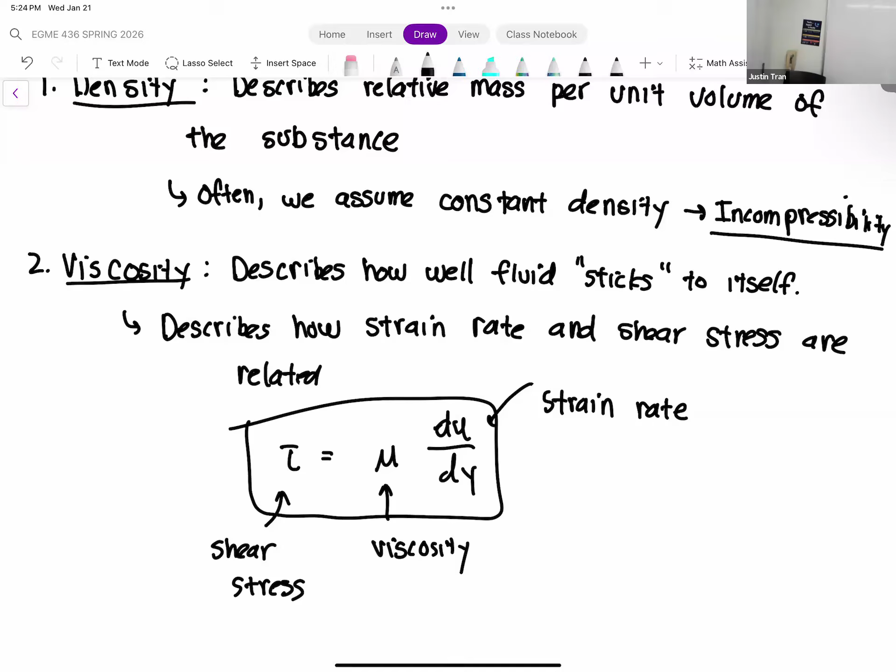Because these are SolidWorks assemblies and you're converting to STL, right? Sometimes that could reset the origin point, because STL is a very simple file format. So I would look for an online tool where you can upload an STL and see where the origin is. You may be able to modify it there, so you may have to manually do that to make sure everything lines up. That's what I would look into. Because just to get a simple run out, I downloaded...